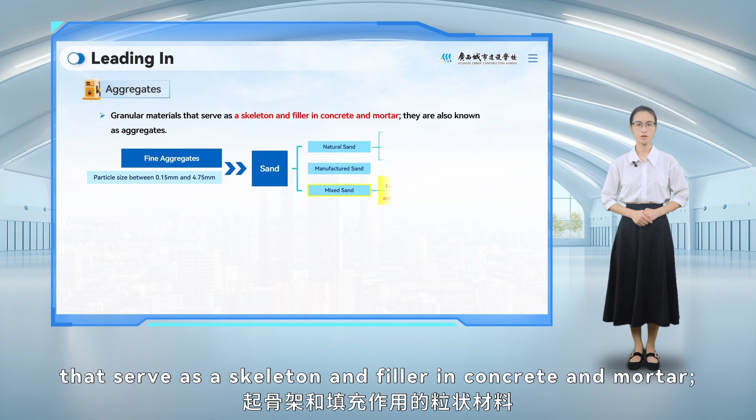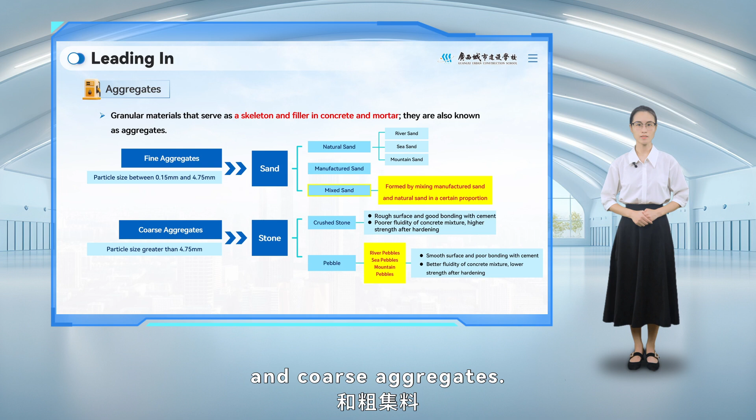In this lesson, we will study the technical requirements for aggregates used in normal concrete. In construction engineering, aggregates are granular materials that serve as a skeleton and filler in concrete and mortar, also known as aggregates. Based on particle size, aggregates are classified into fine aggregates and coarse aggregates. Since aggregates account for a large proportion of concrete, their properties significantly influence the performance of the concrete.

Knowledge objective of this lesson: to become familiar with the technical requirements for both coarse and fine aggregates. Competency objective: to develop the preliminary ability to correctly select coarse and fine aggregates. Professional quality objective: to establish the engineering concept that materials define the foundation and details determine success or failure, while cultivating a rigorous and responsible professional attitude.

First, let's study the technical requirements for fine aggregates. Fine aggregates are classified into categories 1, 2, and 3 according to technical requirements.

According to Sand for Construction, GB/T14684-2022, the main technical requirements for fine aggregates include fineness and particle grading, clay content, stone dust content, clay lumps and deleterious substance content, soundness and crushing index, and the content of flaky particles.

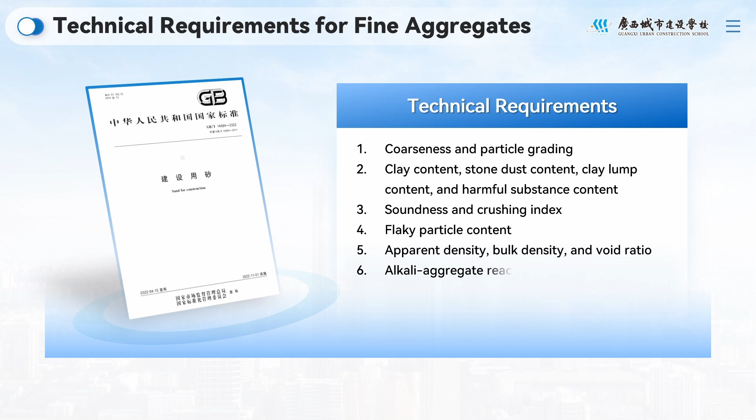The fineness of sand refers to the average degree of coarseness of mixed sand grains with different diameters, expressed by the fineness modulus, mx. Based on its value, sand is categorized into coarse, medium, fine, and extra fine sand.

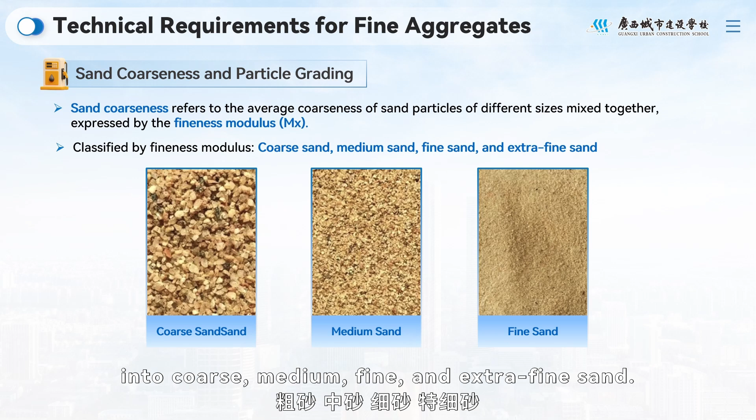Under the same dosage, excessively fine sand consumes more cement and leads to greater long-term volumetric shrinkage, while excessively coarse sand easily causes segregation and bleeding. Therefore, to ensure concrete quality and save cement, medium sand is preferred.

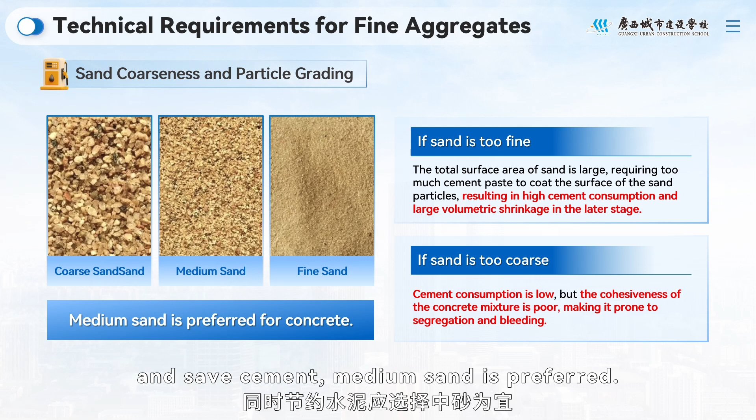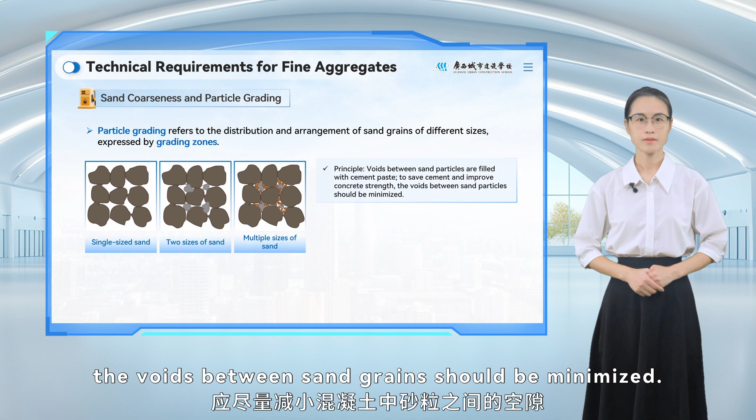Particle grading refers to the distribution and arrangement of sand grains of different sizes, expressed by grading zones. To save cement and improve concrete strength, the voids between sand grains should be minimized. As shown in the diagram, a combination of multiple particle sizes results in the lowest porosity.

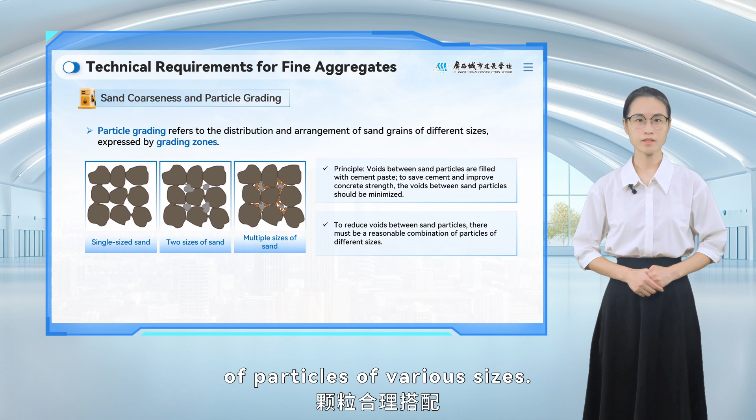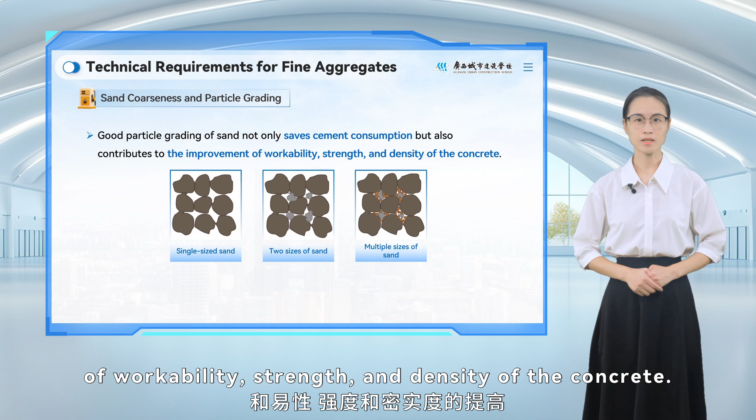Therefore, to reduce the voids between sand grains, there must be a rational combination of particles of various sizes. Good particle grading of sand not only saves cement consumption but also contributes to the improvement of workability, strength, and density of the concrete. The fineness and particle grading of sand are commonly evaluated using the sieve analysis method.

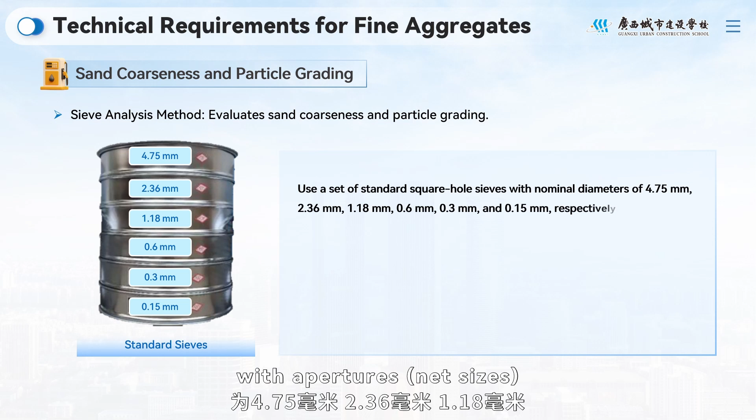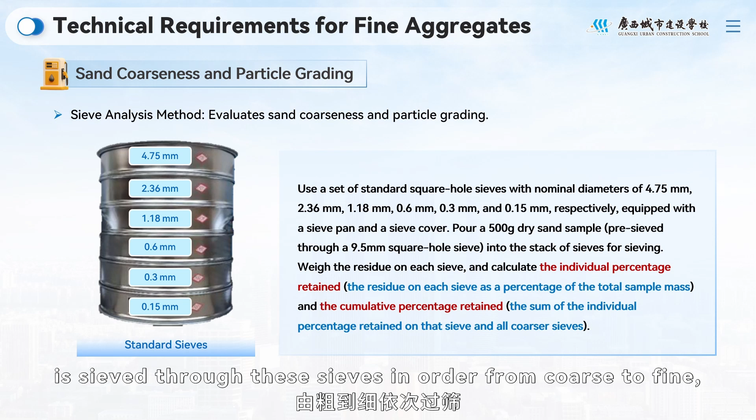The sieve analysis method involves using a set of standard square hole sieves with apertures, net sizes, of 4.75 mm, 2.36 mm, 1.18 mm, 0.6 mm, 0.3 mm, and 0.15 mm. A 500 grams dry sand sample is sieved through these sieves in order from coarse to fine, and the mass retained on each sieve is then weighed.

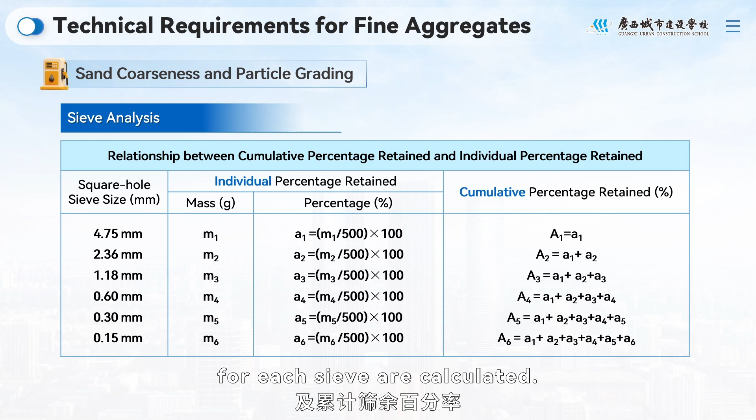Then, the individual percentage retained and the cumulative percentage retained for each sieve are calculated. Based on the cumulative percentage retained, the fineness modulus of the sand is calculated and the grading zone is determined to evaluate the fineness and particle grading of the sand.

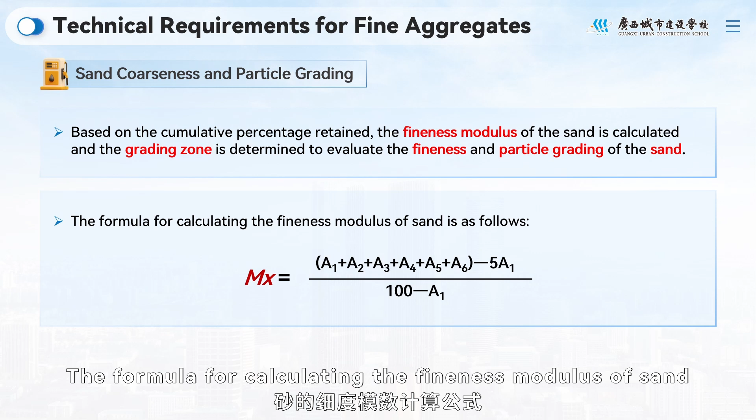The formula for calculating the fineness modulus of sand is as follows. A higher fineness modulus indicates coarser sand.

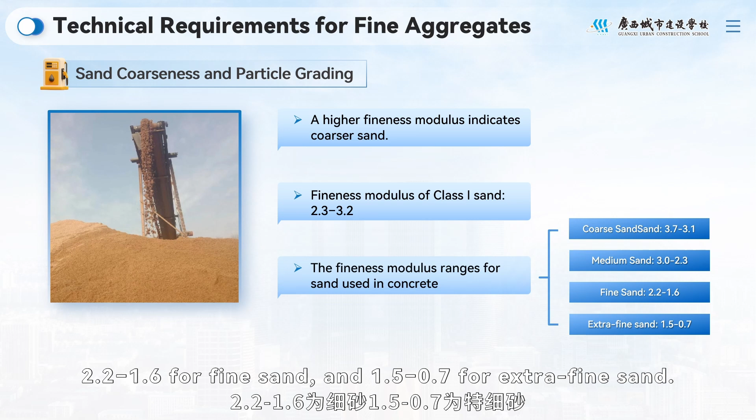For sand used in concrete, the fineness modulus ranges are 3.7 to 3.1 for coarse sand, 3.0 to 2.3 for medium sand, 2.2 to 1.6 for fine sand, and 1.5 to 0.7 for extra fine sand.

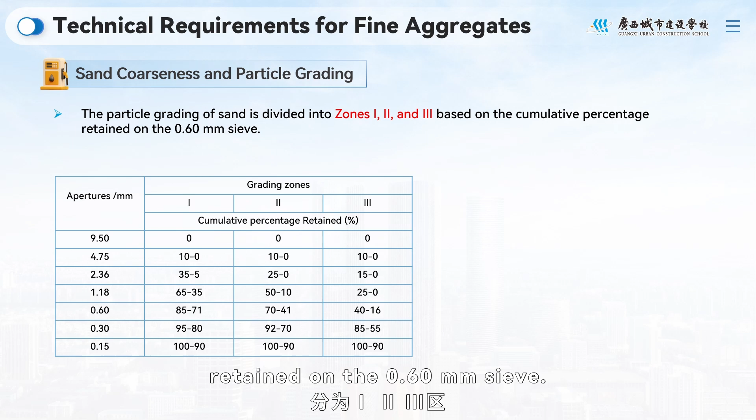The particle grading of sand is divided into zones 1, 2, and 3 based on the cumulative percentage retained on the 0.60 mm sieve. The compliance of the sand grading is determined by the grading zones or the sieving curve.

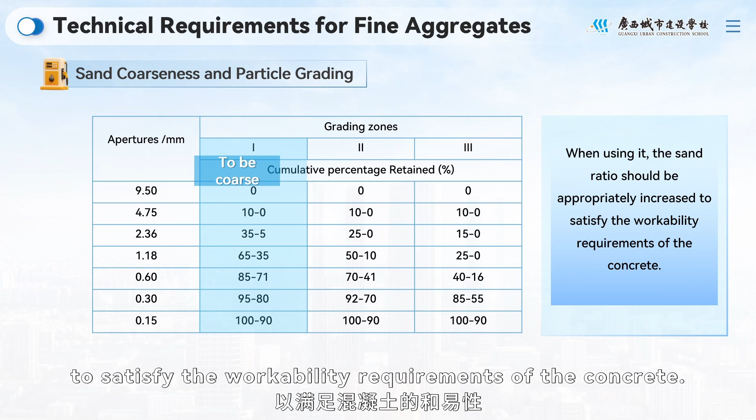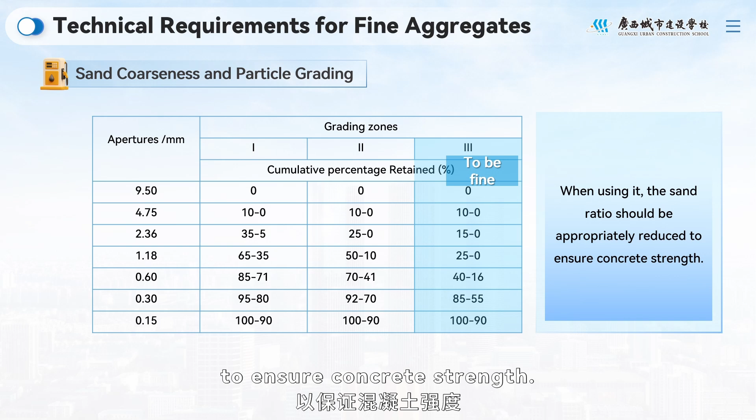Zone 1 sand tends to be coarse. When using it, the sand ratio should be appropriately increased to satisfy the workability requirements of the concrete. Zone 3 sand tends to be fine. When using it, the sand ratio should be appropriately reduced to ensure concrete strength. Zone 2 sand is moderate and should be prioritized when proportioning concrete.

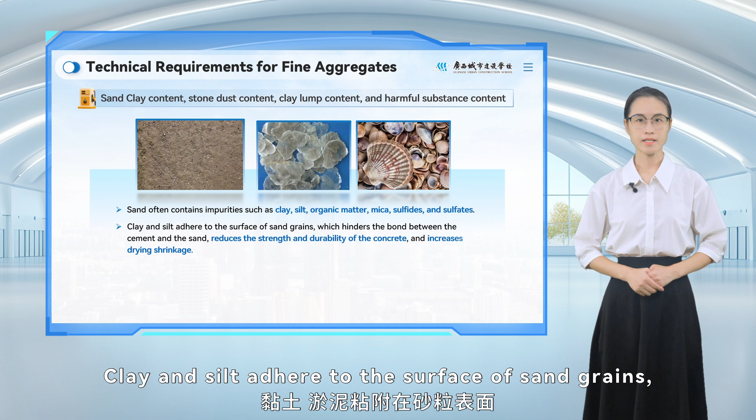Sand often contains impurities such as clay, silt, organic matter, mica, sulfides, and sulfates. Clay and silt adhere to the surface of sand grains, which hinders the bond between the cement and the sand, reduces the strength and durability of the concrete, and increases drying shrinkage.

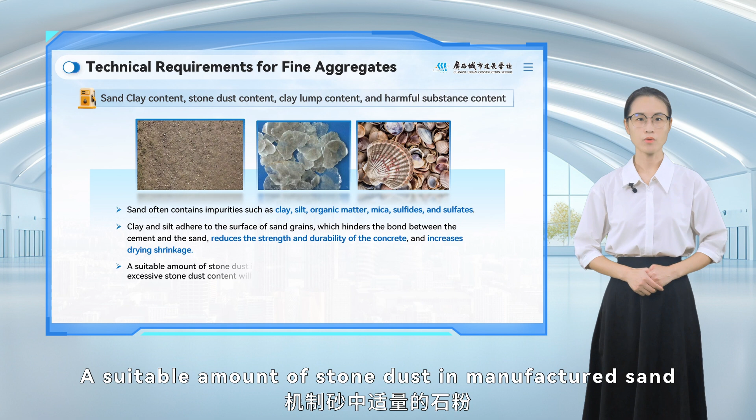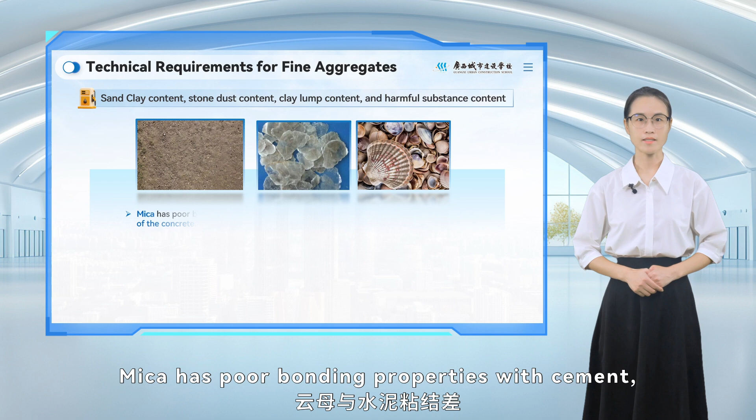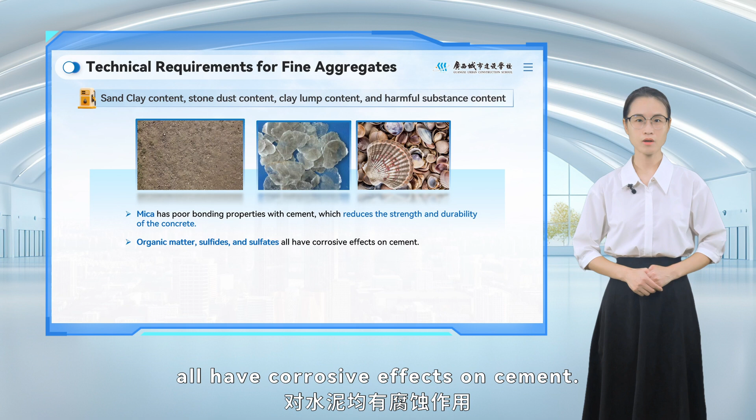A suitable amount of stone dust in manufactured sand is beneficial to concrete, but an excessive stone dust content will adversely affect concrete performance. Mica has poor bonding properties with cement, which reduces the strength and durability of the concrete. Organic matter, sulfides, and sulfates all have corrosive effects on cement. Chlorides accelerate the corrosion of steel reinforcement within reinforced concrete.

Therefore, the clay content, stone dust content, clay lumps, and deleterious substance content in the sand must comply with the following regulations.

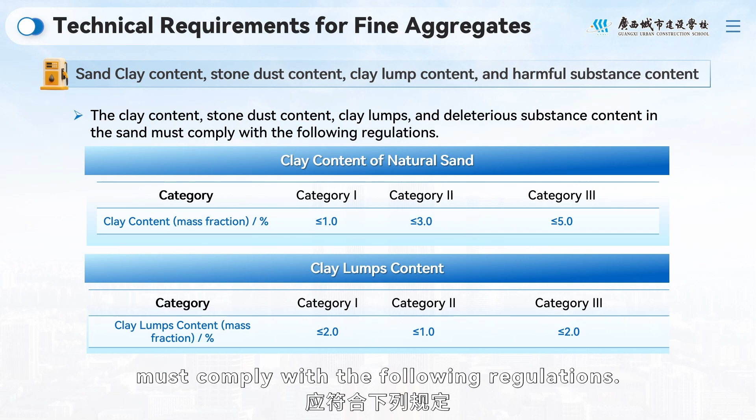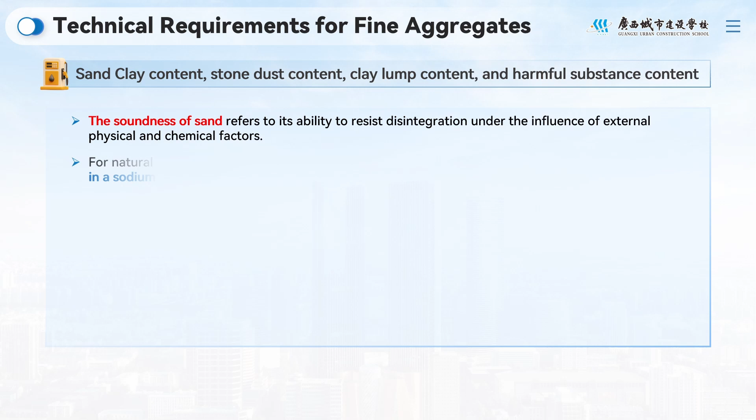The soundness of sand refers to its ability to resist disintegration under the influence of external physical and chemical factors. For natural sand, it is typically expressed by the mass loss after 5 cycles of wetting and drying in a sodium sulfate solution. For manufactured sand, the crushing index is used for representation.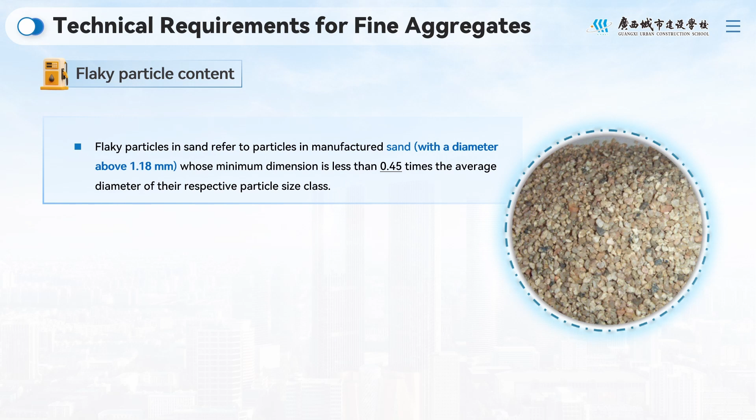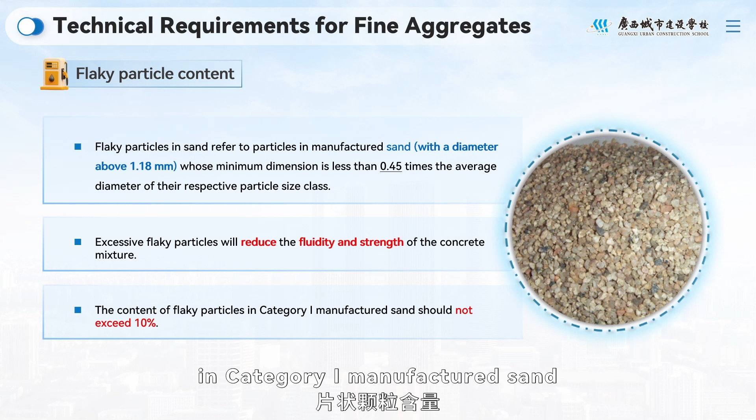Flaky particles in sand refer to particles in manufactured sand, with a diameter above 1.18 mm, whose minimum dimension is less than 0.45 times the average diameter of their respective particle size class. Excessive flaky particles will reduce the fluidity and strength of the concrete mixture. The content of flaky particles in category I manufactured sand should not exceed 10%.

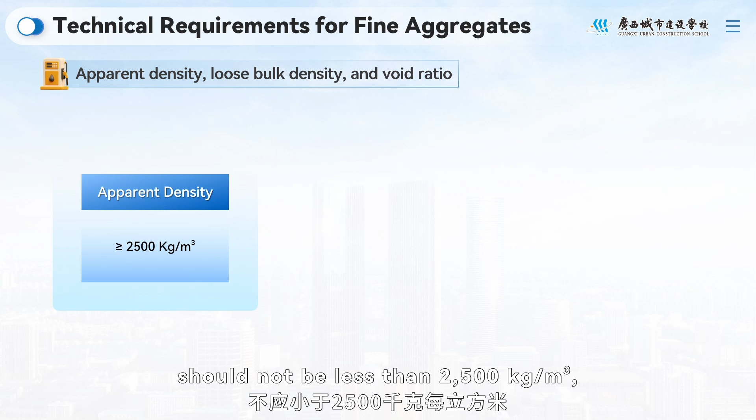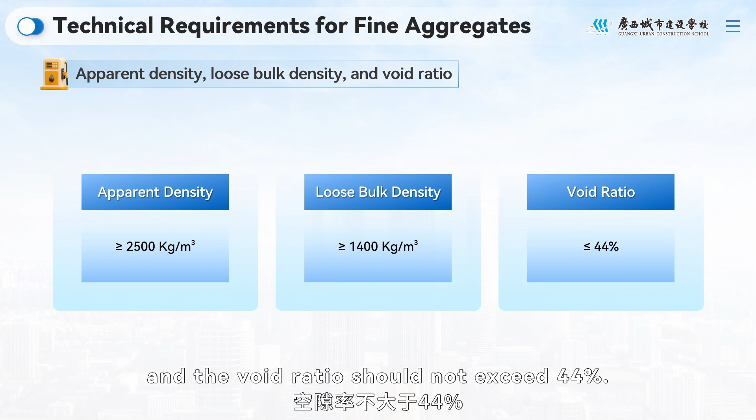The apparent density of sand should not be less than 2,500 kg per cubic meter. The bulk density should not be less than 1,400 kg per cubic meter, and the void ratio should not exceed 44%. The radioactivity of sand shall comply with the regulations of GB 6566.

Alkali aggregate reaction, AAR, refers to the expansive reaction between active minerals in sand and alkalis from the concrete components or the environment, which occurs slowly in damp conditions and leads to cracking and failure of the concrete.

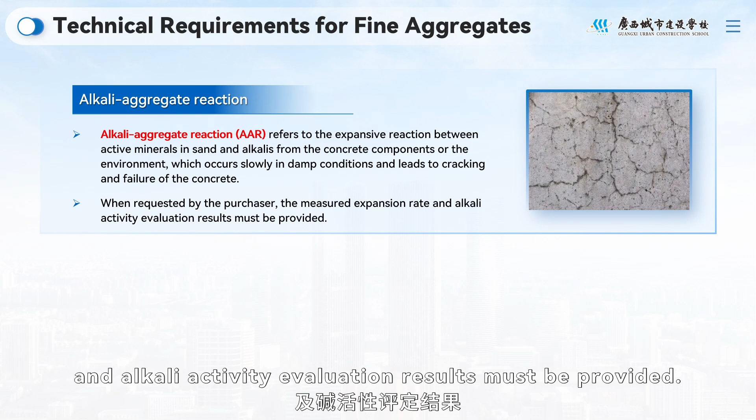When requested by the purchaser, the measured expansion rate and alkali activity evaluation results must be provided. When the purchaser specifies requirements for moisture content and saturated surface dry (SSD) water absorption, the actual measured values must be presented.

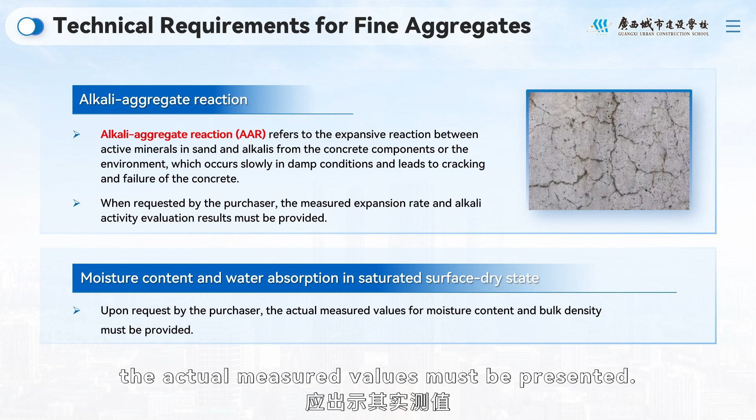Next, we will study the technical requirements for coarse aggregates. Coarse aggregates are classified into categories 1, 2, and 3 based on their technical requirements.

The standard for pebbles and crushed stone for construction, GB/T14685-2022, specifies the main technical requirements for coarse aggregates as particle grading and maximum size, clay content in pebbles, clay/dust content in crushed stone, clay lumps and deleterious substances, content of needle-like, elongated, and flaky particles as well as irregular particles, strength and crushing index, and soundness.

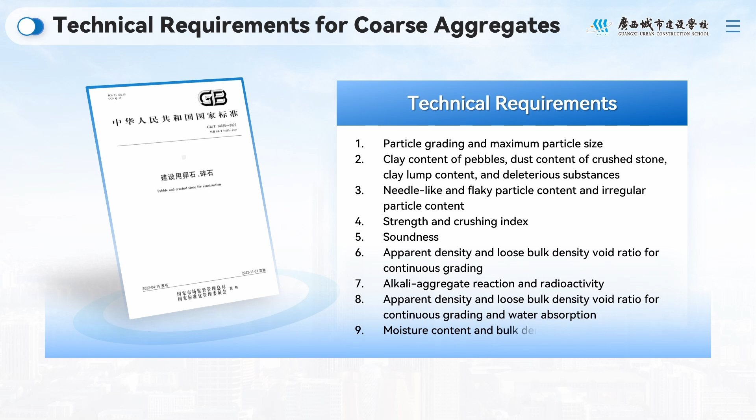The principle of grading for coarse aggregate is basically the same as for fine aggregate. It also requires good particle grading to reduce porosity, save cement, and improve the density and strength of the concrete. The particle grading of coarse aggregate is also evaluated using the sieve analysis method.

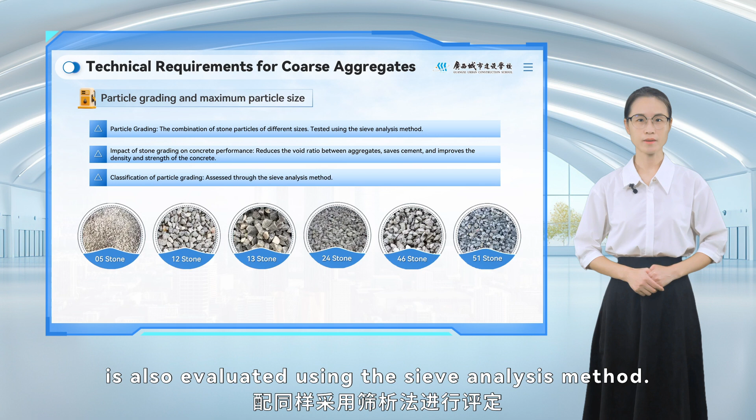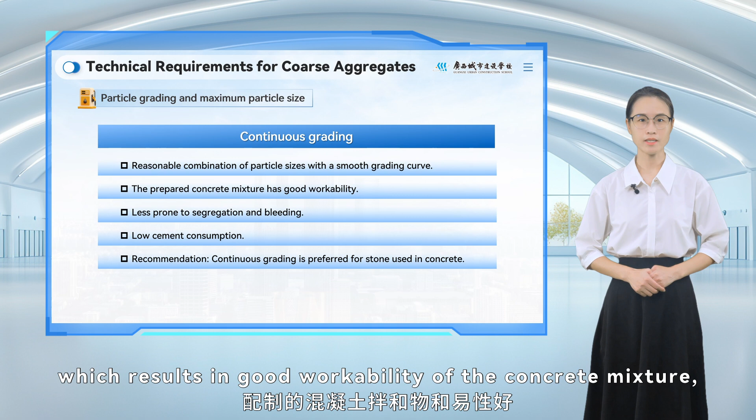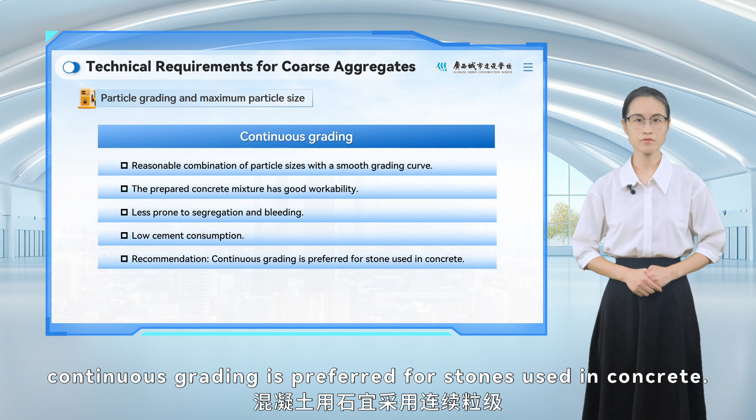Particle grading of coarse aggregate includes continuous grading and single-sized, gap grading. Stones with continuous grading have a rational size distribution, which results in good workability of the concrete mixture, prevents stratification and segregation, and requires less cement. Therefore, continuous grading is preferred for stones used in concrete.

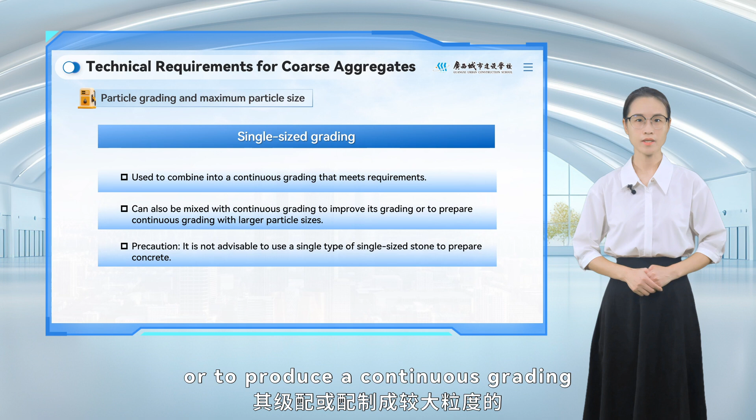The maximum particle size of coarse aggregate refers to the upper limit of the nominal size range of the stone. The specifications of stones are expressed by nominal size ranges. For example, for stones with a size range of 5 to 20 millimeters, the maximum particle size is 20 millimeters.

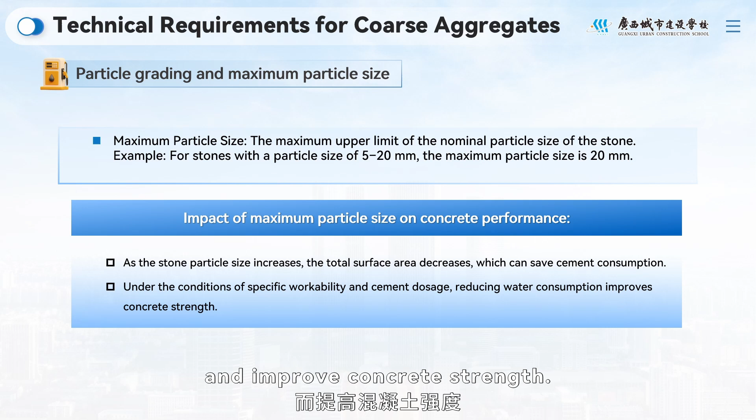As the stone size increases, the total surface area decreases, which saves cement. Under specific workability and cement dosage conditions, it can also reduce water consumption and improve concrete strength. Therefore, within permissible limits, the largest possible maximum particle size should be chosen, though it is restricted by factors such as the cross-sectional dimensions of the concrete structure and the clear spacing between steel bars.

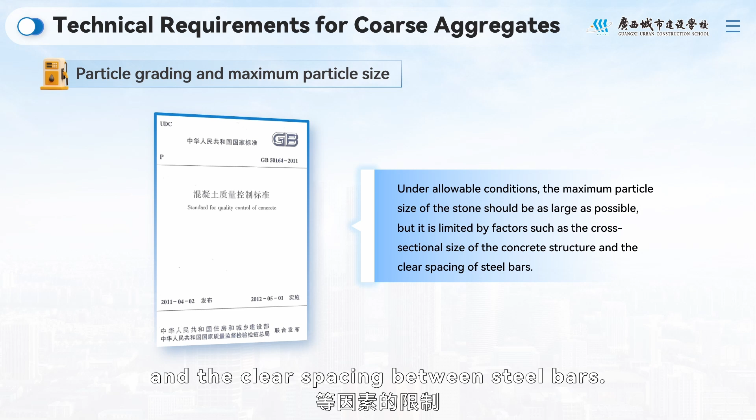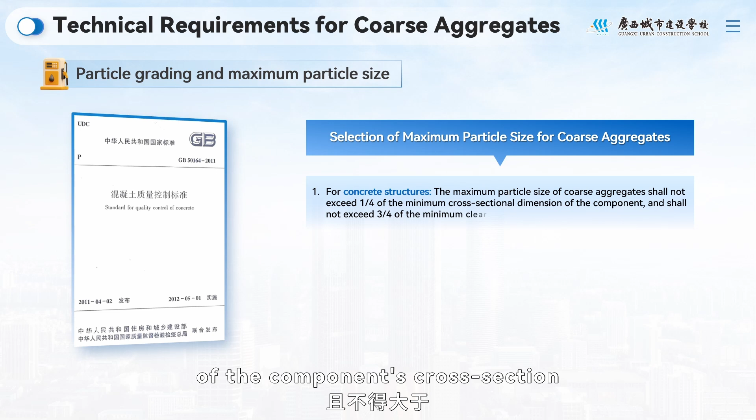The Standard for Quality Control of Concrete, GB 50164-2011, stipulates the following. 1. For concrete structures, the maximum particle size of coarse aggregate shall not exceed 1/4 of the minimum dimension of the component's cross-section and shall not exceed 3/4 of the minimum clear spacing between steel bars.

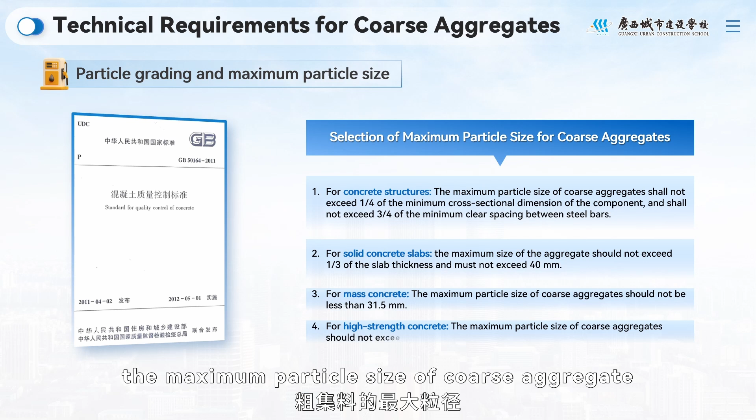2. For solid concrete slabs, the maximum size of the aggregate should not exceed 1/3 of the slab thickness and must not exceed 40 millimeters. 3. For mass concrete, the maximum particle size of coarse aggregate should not be less than 31.5 millimeters. 4. For high-strength concrete, the maximum particle size of coarse aggregate should not exceed 25 millimeters.

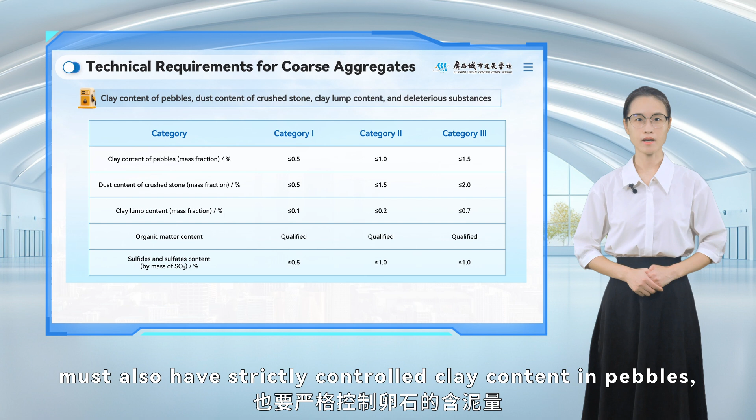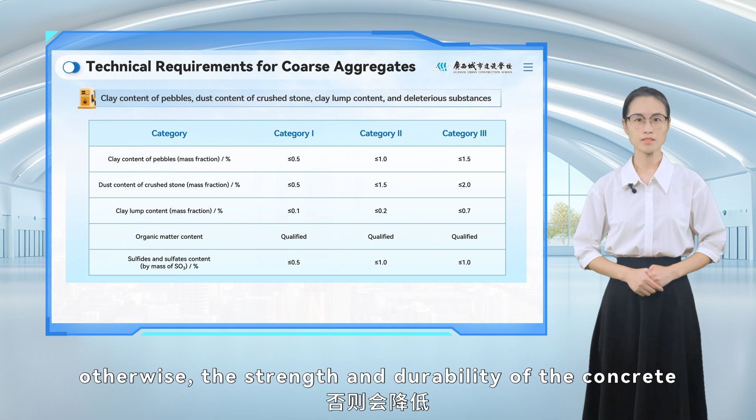Like fine aggregates, coarse aggregates must also have strictly controlled clay content in pebbles, clay/dust content in crushed stone, clay lumps, and organic matter, sulfide, and sulfate content. Otherwise, the strength and durability of the concrete will be compromised.

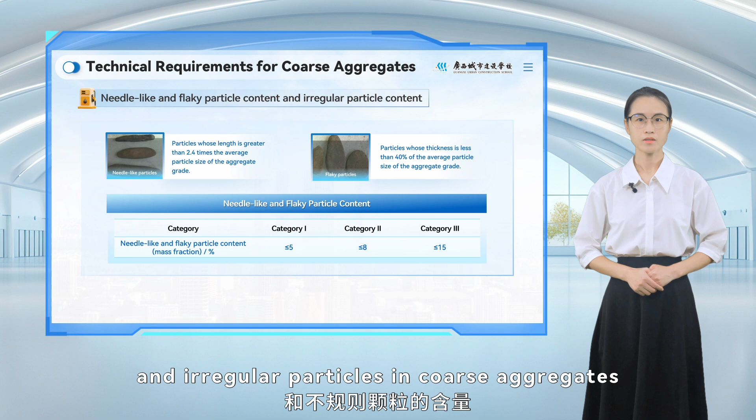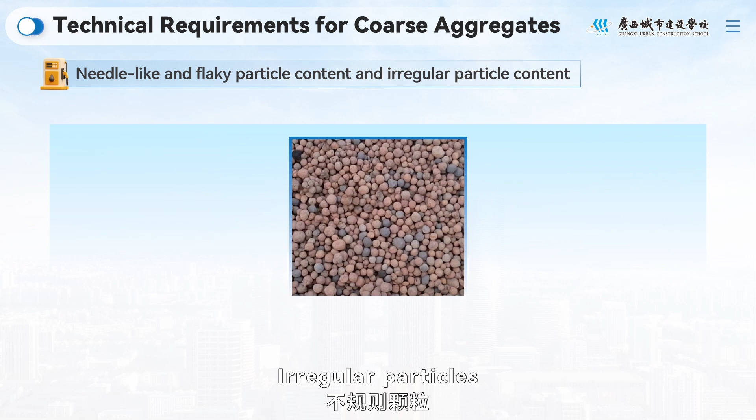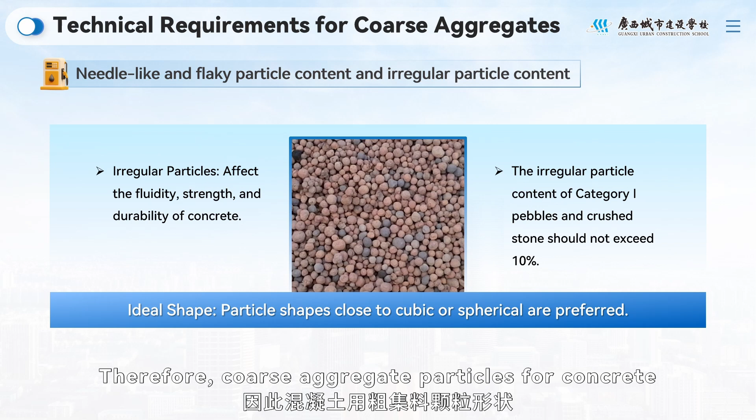In addition, the content of needle-like/flaky particles and irregular particles in coarse aggregates must be limited. An excess of needle-like and flaky particles will reduce the fluidity of the concrete mixture and affect its strength. Irregular particles can affect the fluidity, strength, and durability of the concrete. Therefore, coarse aggregate particles for concrete are ideally cubic or spherical in shape.

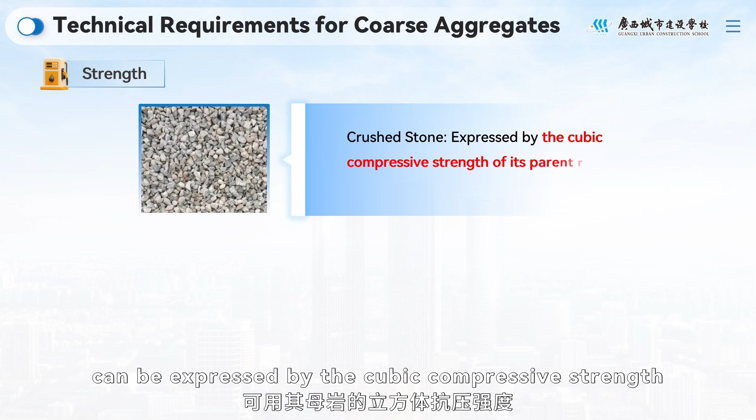The strength of crushed stone can be expressed by the cubic compressive strength of its parent rock and the crushing index value of the stone. The strength of pebbles is expressed by the crushing index value. The compressive strength of the rock should be at least 20% higher than the design strength of the concrete.

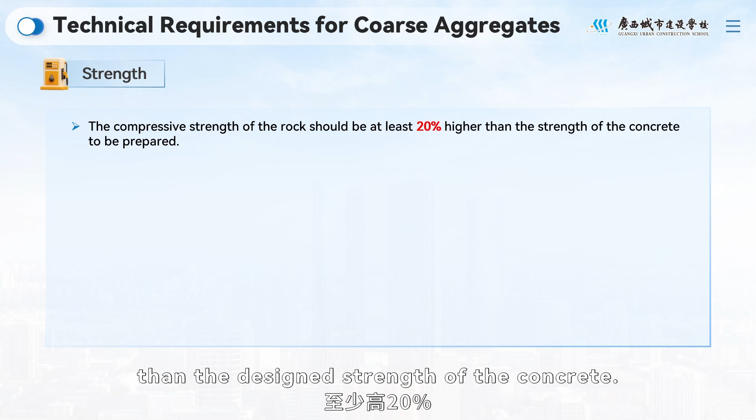When the concrete strength grade is C60 or higher, the compressive strength of the aggregate rock must be tested. For routine production quality control in engineering, the crushing index test is utilized. The compressive strength of the parent rock used for crushed stone must comply with the specifications in the table below.

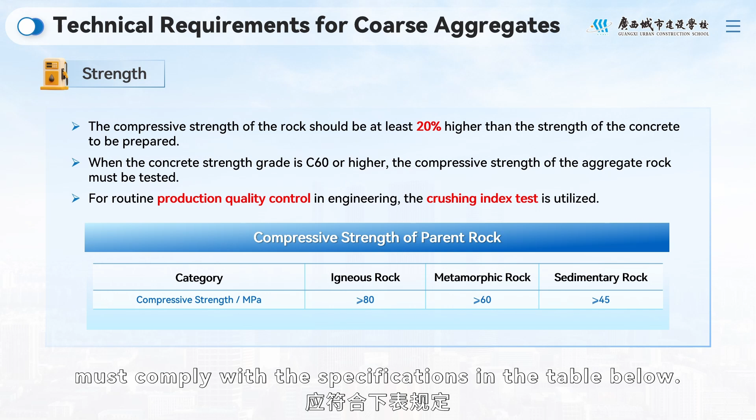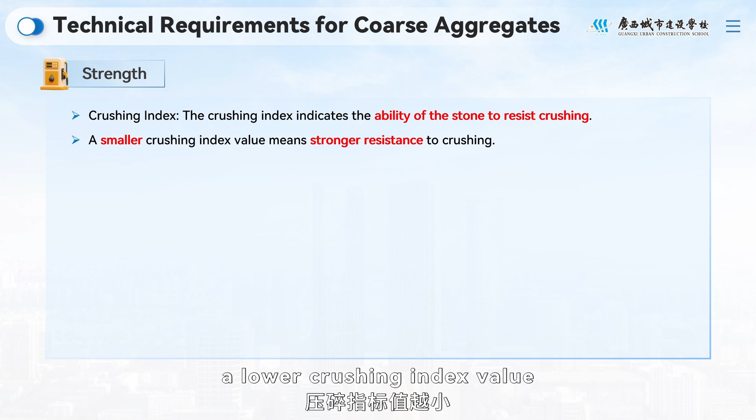The crushing index represents the stone's resistance to being crushed. A lower crushing index value indicates a stronger resistance to fragmentation. The crushing index must comply with the specifications in the table below.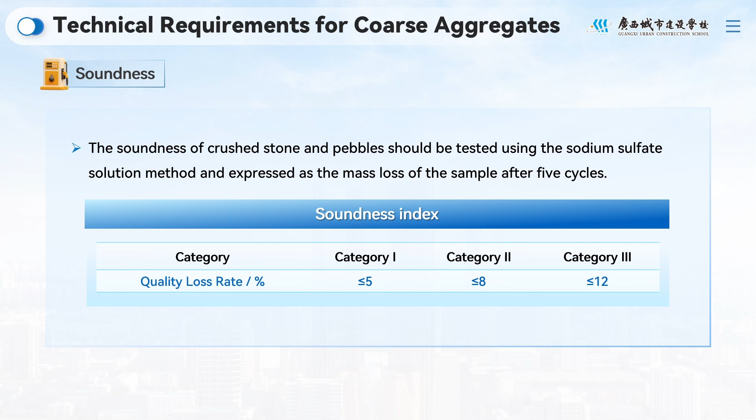The soundness of crushed stone and pebbles should be tested using the sodium sulfate solution method and expressed as the mass loss of the sample after 5 cycles. The requirements for alkali aggregate reaction and radioactivity for coarse aggregates are the same as those for fine aggregates.

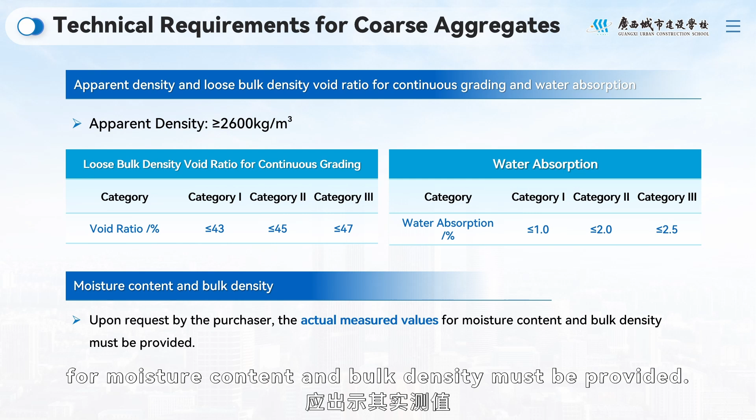The apparent density of crushed stone and pebbles shall not be less than 2,600 kilograms per cubic meter. And the loose bulk density, void ratio, and water absorption for continuous grading must meet the requirements in the table. Upon request by the purchaser, the actual measured values for moisture content and bulk density must be provided.

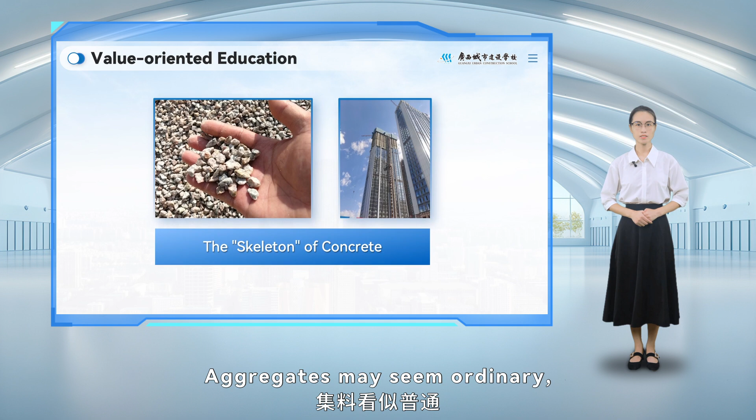In this lesson, we have studied the main technical requirements for coarse and fine aggregates in normal concrete and clarified the significance of applying relevant national standards in actual engineering projects. Aggregates may seem ordinary, but they are the skeleton of concrete. Their quality directly affects the safety, durability, and economic efficiency of engineering projects.

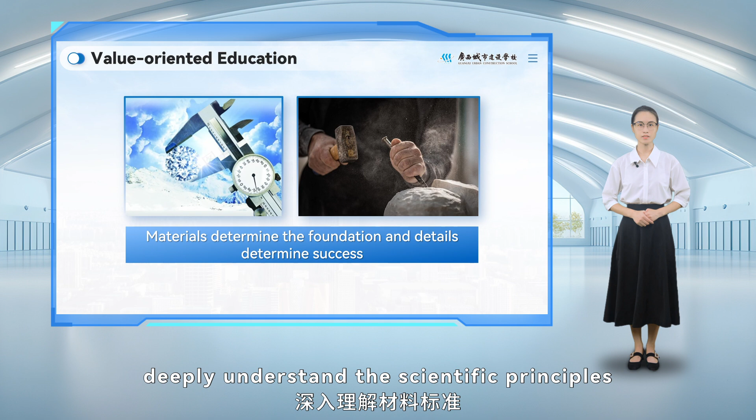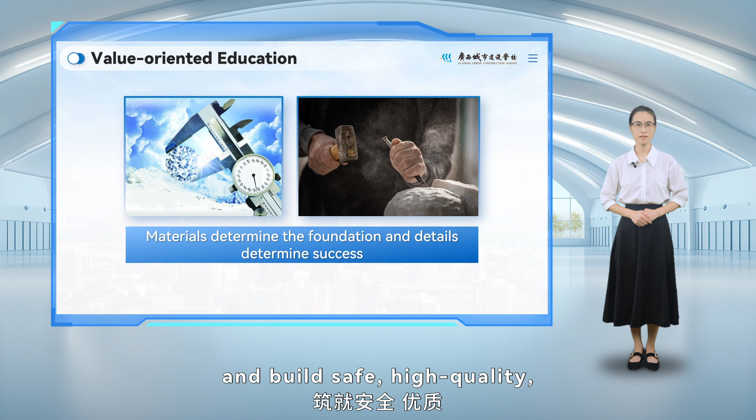I hope you will always uphold a rigorous, pragmatic, and excellence-oriented professional attitude. Deeply understand the scientific principles and safety considerations behind material standards. Solidify your professional foundation and build safe, high-quality, and green construction projects.